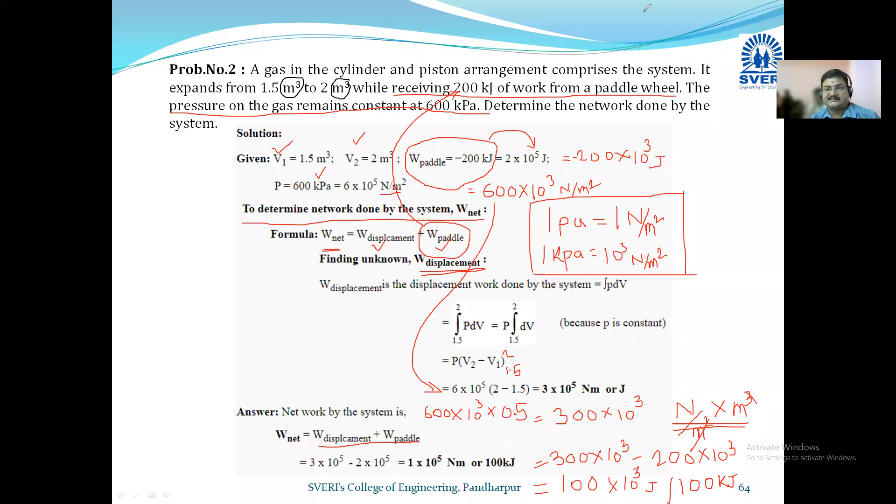Everybody? Yes, Yes sir. Please note it down fast. So friends, have you written it? Yes sir. Okay, yes sir.

So let us move towards next problem, and this problem is very interesting problem. Tabular type of the problem. तर हा तुम्हाला परीक्षेमध्ये थोडाफार पडण्याची शक्यता आहे कारण खूप सोपा प्रॉब्लेम आहे.

First thing, process 1. So first law of thermodynamics is applicable over here because whatever formulas we have seen, it was only related with the first law of thermodynamics. Statement of the second law of thermodynamics we have studied. त्याचं कुठलं मॅथमॅटिकल इक्वेशन किंवा फॉर्म किंवा डेरिव्हेशन आपल्याला सिलेबस मध्ये नाही. So what is the first law of thermodynamics? I will write the formula.

Q or delta Q is equal to delta W plus delta E, or Q is equal to W plus delta E in this case. Is it the first law of thermodynamics? Yes sir. Q is nothing but W plus internal energy. Heat is converted into work plus internal energy. All heat will not convert into work.

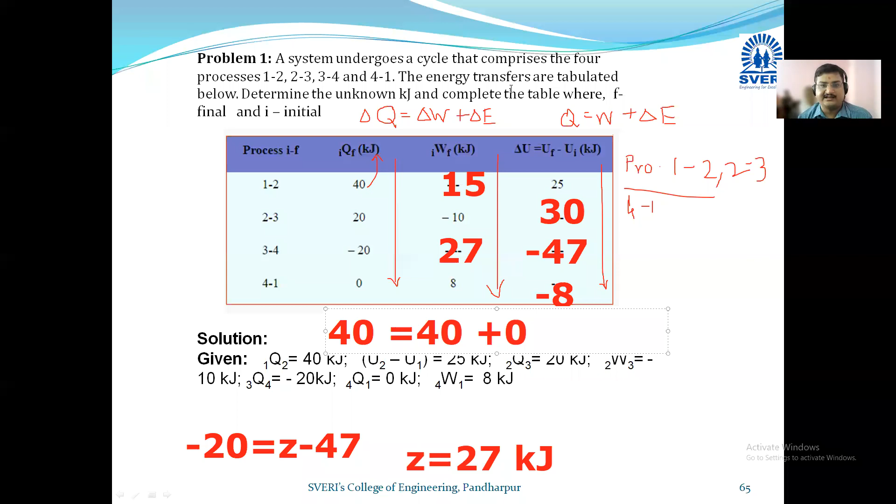But sir, this cannot happen practically. That example was given ideally. Yeah, so I'll clear this and let us check the final answer, whether all answers are as per our convenience, as per our values or not. Just a minute.

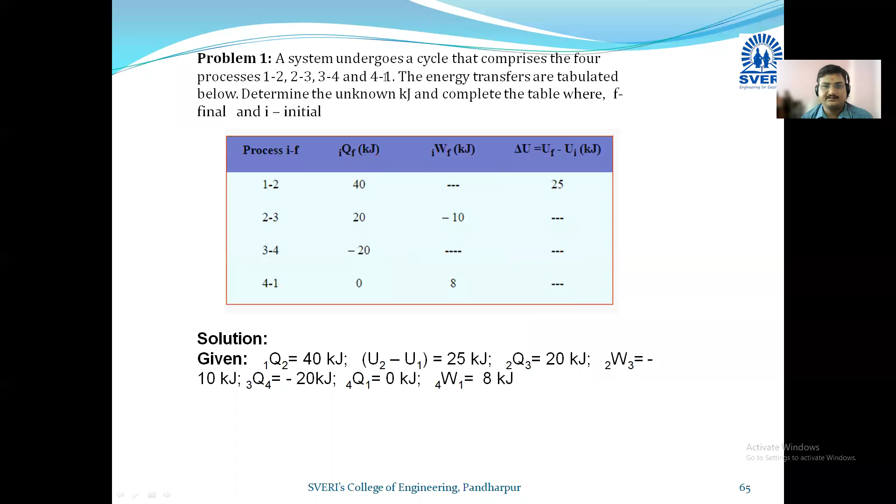See, why process such a huge table unnecessarily? Is there a need to do that? Your examination is online examination, so if such a table will be asked, they will ask value of 2-3 processes continuously. Instead of writing all the formulas etc, directly you can solve it in the rough work, and within 1 minute you can solve this table.

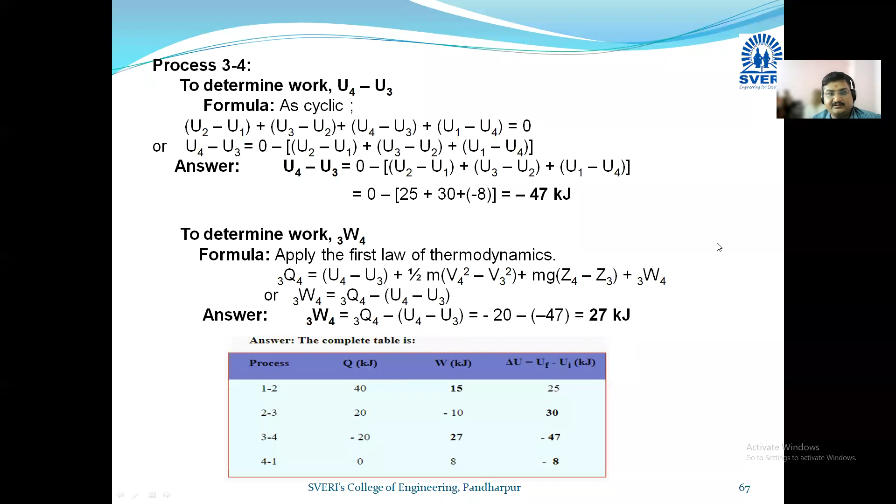Okay, see answers: minus 15. Yes sir, plus 15 minus 10, yes. 27 and 8, yes. Here 25, 30 minus 47 minus 8. Yes, all values are satisfied. So here we have solved this particular equation.

And in this way the thermodynamics chapter is concluded, but our work is not concluded. I will provide just a 2 to 3 minutes break, and we will move towards our unit number 7, power transmission systems. Can I go? Yes.

So in this unit number 7, power transmission system, we are going to see the belt drives - open and cross belt drives, material of the belt, type of belt, length of belt for open and cross drive, velocity ratio of simple and compound belt drive, centrifugal tension, and maximum power transmitted. In the second part, other transmission systems like chain drive and gear drive we are going to learn.

So friends, first of all let us understand what do you mean by power transmission system. So to perform different types of work, you need to transmit the power.

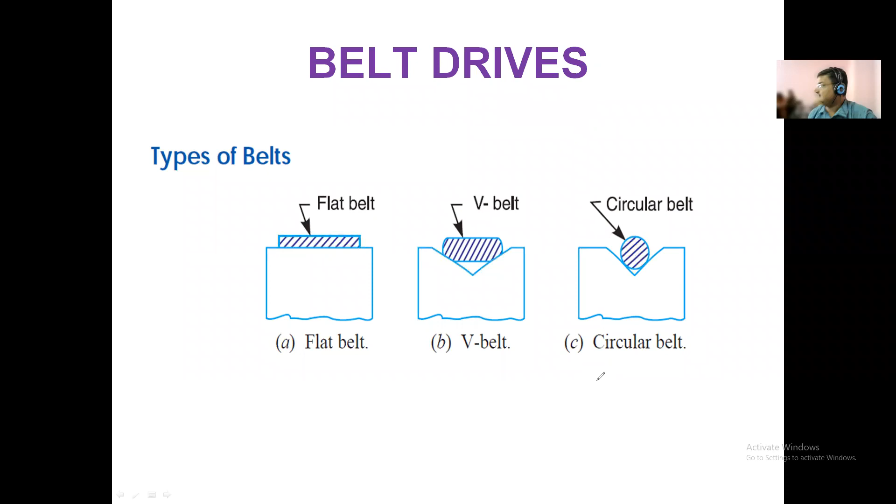Let us move towards the next bit, and that bit is materials of the belt. To prepare the belt, which material are we using? Number one, we are using leather belt.

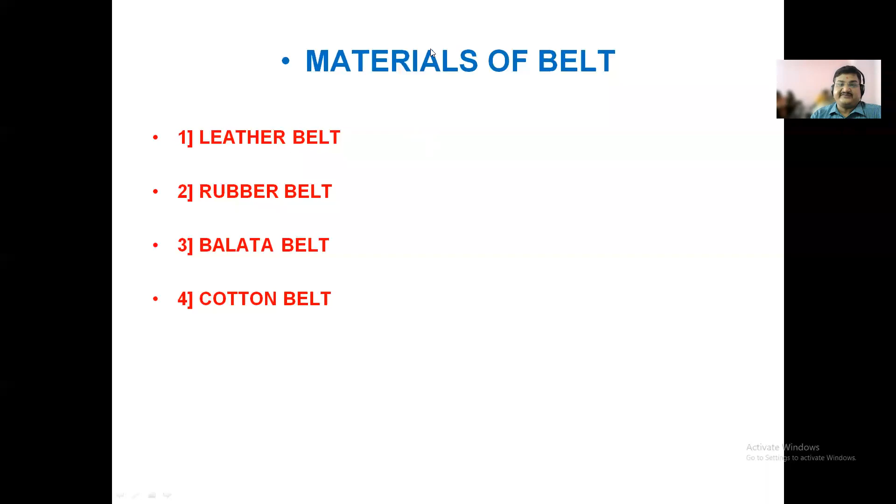We use a leather strap, right? Sometimes we use a rubber belt because elasticity is good as far as rubber is concerned. The third material is balata rubber.

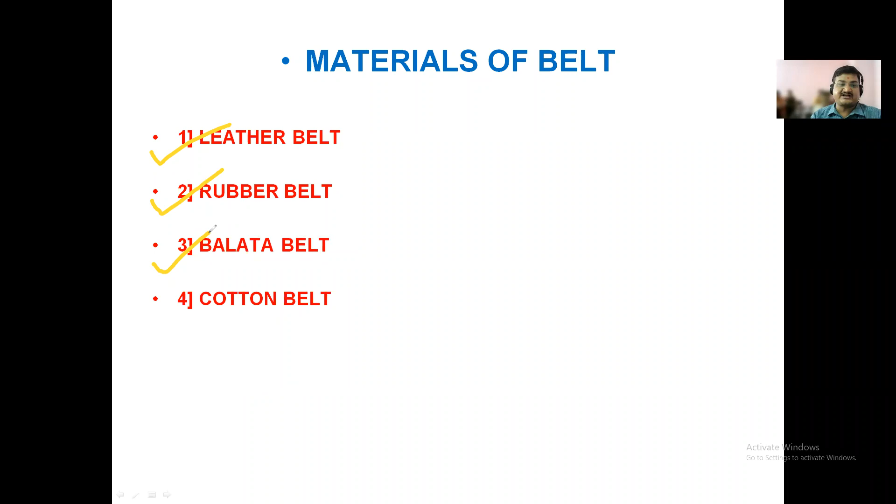Yes sir. So let us move towards the next concept, that is types of the belt drive.

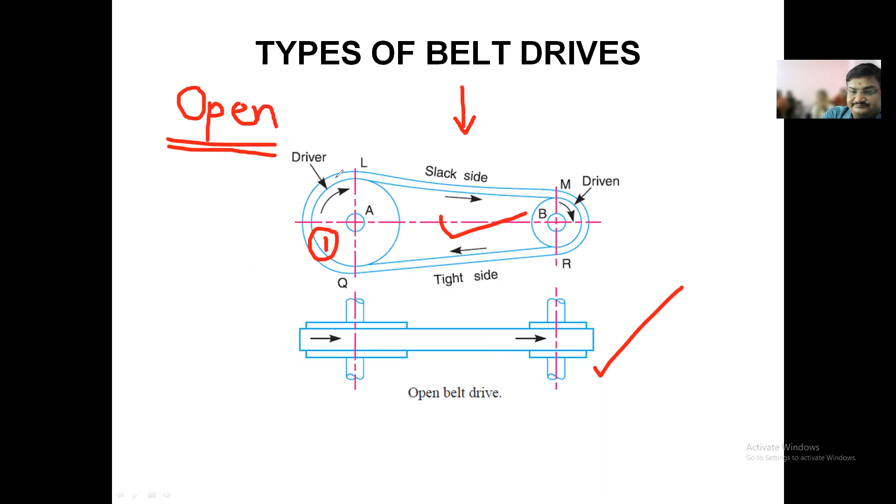So this is the open belt drive. Space is open over here.

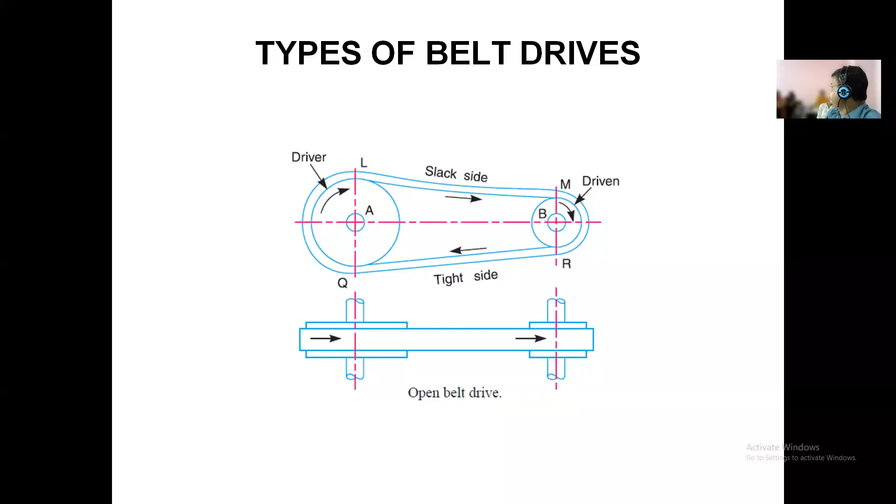Draw it fast. Then you can go for quarter turn belt drive. That is the third type.